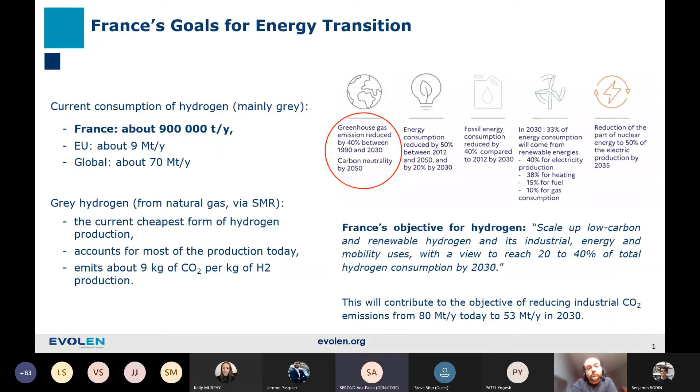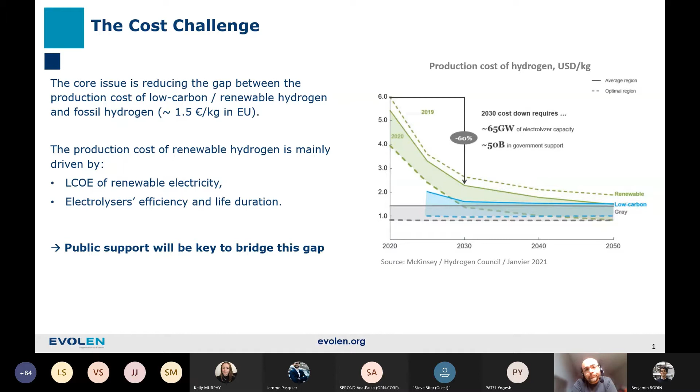So what are the stakes of this French hydrogen strategy? First, we have environmental stakes: decarbonation of industry and transport and overall reduction of greenhouse gas emissions. Second, we have economical stakes: the emergence of a new job-creating sector, and I'll present the objective afterwards. Third is energy sovereignty: we want smaller dependency on hydrocarbon imports. And fourth and last is technological independence, to enhance French assets in global competitiveness. Next slide, please.

So this French national strategy is quite ambitious and is designed along 3 axes. The first one is the decarbonation of the industry via the emergence of a French electrolysis sector. So we want first to decarbonize all the existing industrial uses that I've presented previously, mainly refining and ammonia, and also an industrialization supported by the massification of uses, in particular in the mobility sector.

The second axis is to develop heavy transport mobility using decarbonized hydrogen. This will be done via large territorial projects driven mainly by the French regions, allowing to mutualize hydrogen demand. The third axis is the promotion of R&D, innovation, and development of French expertise, including hydrogen to mitigate intermittency of renewable sources, new industrial uses, decarbonation of maritime and aerial transport, new infrastructures, and development of university campuses.

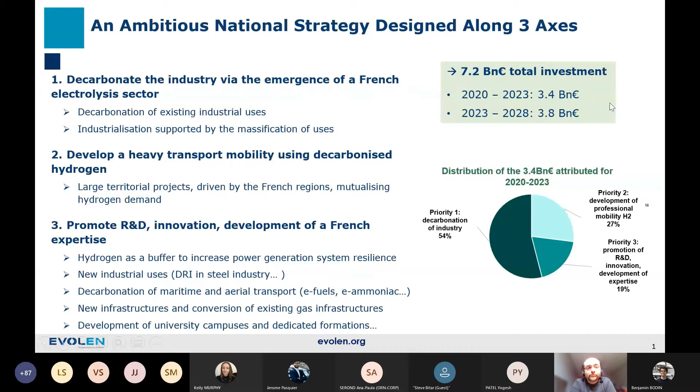The main objective of the French hydrogen strategy is to increase the installed base of electrolyzers from where it was in 2020, about 5 megawatts, up to 6.5 gigawatts by the end of this decade. That will represent an annual production of about 700,000 tons of green hydrogen per year, with corresponding avoided carbon emissions of 6 million tons per year, equivalent to the annual emissions of Paris.

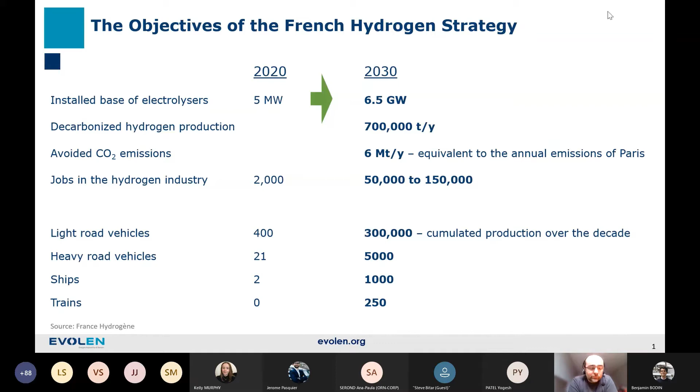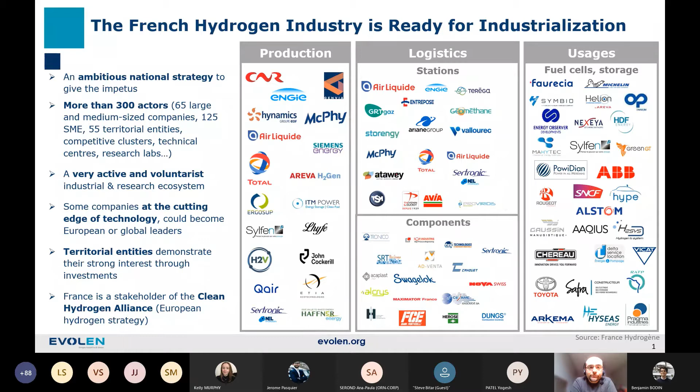Second, we've got in France the second largest offshore wind power potential in Europe after the UK, which could be key to developing hydrogen production from offshore wind - I will come back to this point afterwards. Third, we've got a low carbon electricity mix, one of the lowest in Europe and in the world, thanks mainly to nuclear energy. Fourth, we've got strong potential for storage in saline aquifers, with more than 100,000 tons of hydrogen capacity.

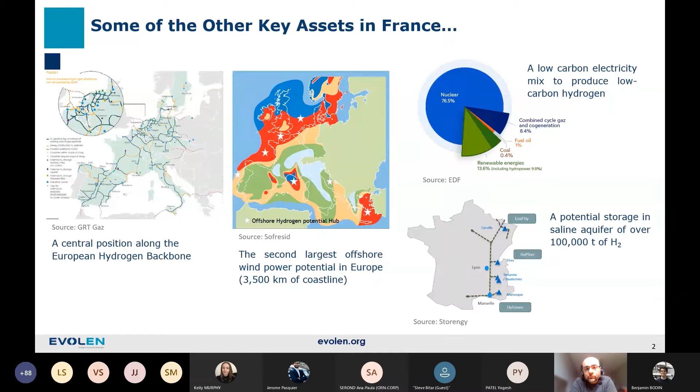Okay, so just a quick focus on one of the working groups we have within EVOLEN. This is a group dedicated to hydrogen production from offshore wind. The objective of this working group is to define business models applicable to the French market. We are trying to answer some key questions, such as: what is the value of producing hydrogen offshore rather than onshore? What is the optimal location for electrolyzers - in a dedicated platform or on the turbine? What are the technological requirements, in particular the marinization of electrolyzers, etc.

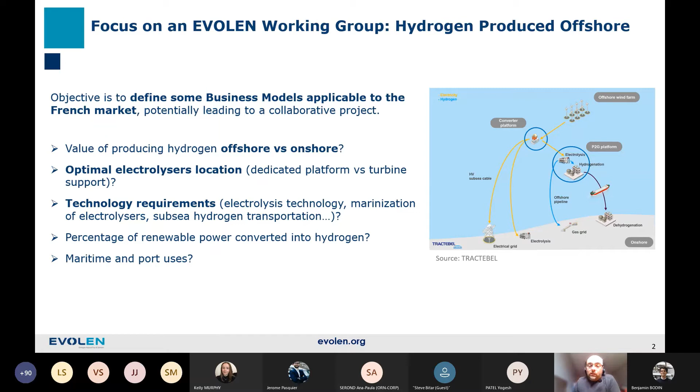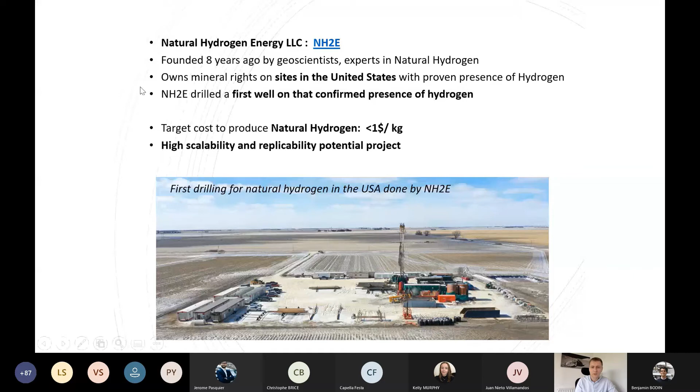I also sent a link for the video. I don't know if the video will be included in the presentation or not. And next slide, please. Yeah, sorry, go a little back.

And what is important to point out is that for the first time with natural hydrogen, hydrogen is not just an energy vector where you need another source of energy—electricity, methane, biomass, or something else—which you then convert to hydrogen and use. In the case of natural hydrogen, it is a primary source of energy.

So this is a primary new source of renewable energy. And of course, you can read more in detail in this paper.

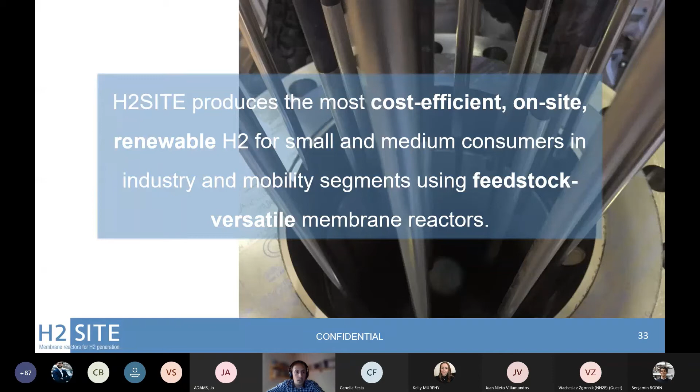The company was actually created as a spin-off from Tecnalia and the Technical University of Eindhoven. Both entities had collaborated on European projects for the last 10 years, gathering more than 70 million euros in European project funds to develop this concept of advanced membrane reactors. So once they got to a TRL level of around 8, partners looked for an external investor, and ENGIE showed its trust in the technology.

Since the investment of ENGIE, the company has raised 3 million euros in equity and non-dilutive funding, and these have been used to build the first 2 commercial reactors and to build a membrane manufacturing line that is being installed in Spain, and that will be operational in January 2021. Next slide, please. Well, why have we done that? In a nutshell, it's because, next slide, please.

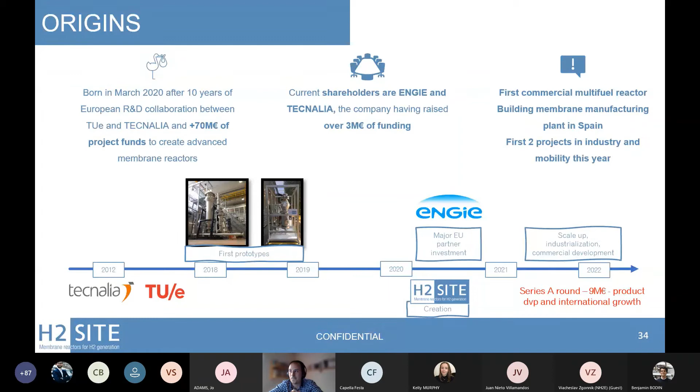Thank you. Because we know that transporting hydrogen is a pain in the neck. There are plenty of people that say that hydrogen will cost 1.5 euros per kilogram or 2.5 euros per kilogram, but the average small and medium consumers are paying 11, 12, 15 euros per kilogram. So transport represents today between 60 and 80% of the end price that consumers pay for this gas.

And this is not only an inefficiency in the form of price, but also an environmental issue, because over 10% of the hydrogen leaks during the compression, storage, and decompression phase. And hydrogen is actually an indirect greenhouse gas that has 5.6 times the global warming potential that CO2 has. So the question for us as a society, I guess, is, do we want to replace the CO2 problem with a hydrogen problem? Well, within H2Site, we do want to solve this problem for a market that is today poorly served, which is small and medium consumers of hydrogen.

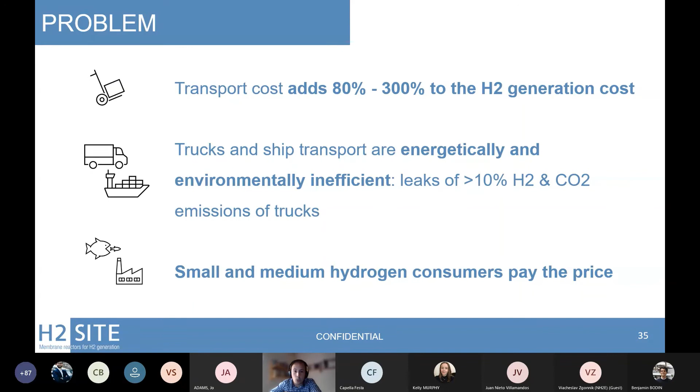Next slide, please. How does it work? Well, we actually do not like putting all our eggs in the same basket. This is why our systems are designed to work with very different feedstocks. We work with methanol, with biogas, with ammonia, with ethanol, with DME; we take whatever feedstock is available that contains hydrogen. We put it into a column that contains these small rods that you can see on the picture.

And these rods are our membranes. These membranes have a very, very high selectivity towards hydrogen, which is the only thing that can go through them. And this allows us to obtain fuel cell purity hydrogen in one single process step. All this goes into a 20-feet container that we deliver to our customers and install in 3 days. Next slide, please.

This is actually what our customers are asking from us. It's a modular, compact solution that they can install and remove in a few days, that can adapt easily to different environments. We are now targeting 4 market segments.

The first one is small and medium hydrogen consumers like flat glass, small chemistry, food and beverage. The second one is mobility for captive fleets like hydrogen refueling stations for buses and so on, but also onboard mobility to replace heavy fuel oil for the maritime sector.

Then there is separating hydrogen and adjusting the hydrogen content for hydrogen retailers and natural gas infrastructure owners. And finally, decarbonized backup power solutions for data centers and sensitive industrial processes.

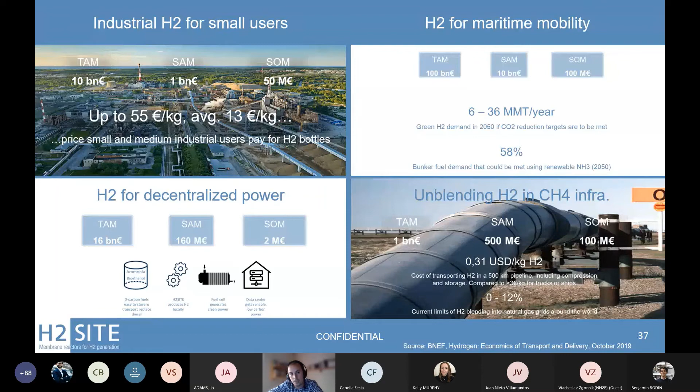So there are 2 product verticals within H2Site. The reactor you can see there is the generation vertical, right? So what we will do is we will feed, for example, ammonia through the lower part of it. We will heat it up to 300, 350 degrees, and hydrogen will go through the membranes that are inside the reactor, and we will recover it through the upper part of the reactor, sending nitrogen gas to the atmosphere.

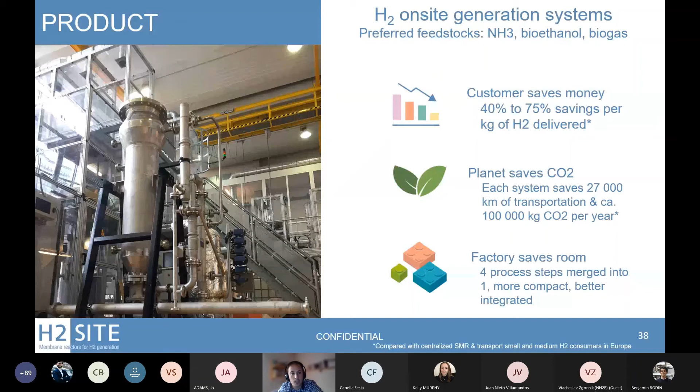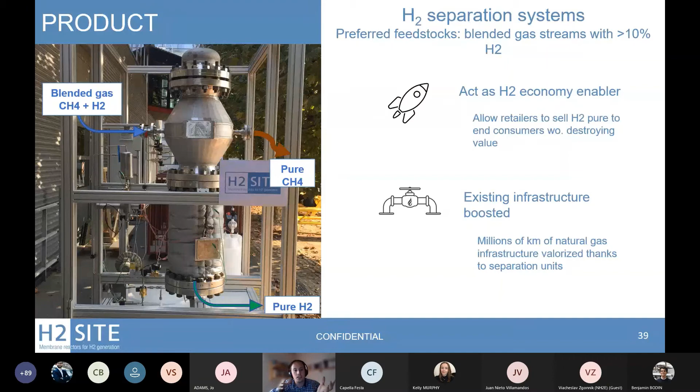This second column, thank you, that you can see there represents the product vertical separation. So as you can see, the column looks very similar, only there is no reaction in it. Membranes will simply act as a filter, and we will separate, for instance, the hydrogen from the CH4 in the blended gas stream.

So to summarize, our reactors today have been designed for small and medium hydrogen consumers from 4 to 4,000 kilograms per day, with numerous feedstocks and working at low temperatures, without the inefficiencies linked to downscaling a larger process that is meant to produce several tens or hundreds of tons per day.

And we hold intellectual property today that covers our unique membranes, the manufacturing and palladium recovery process that we use for our membranes in very little amounts, and the hydrogen separation capabilities from blended streams.

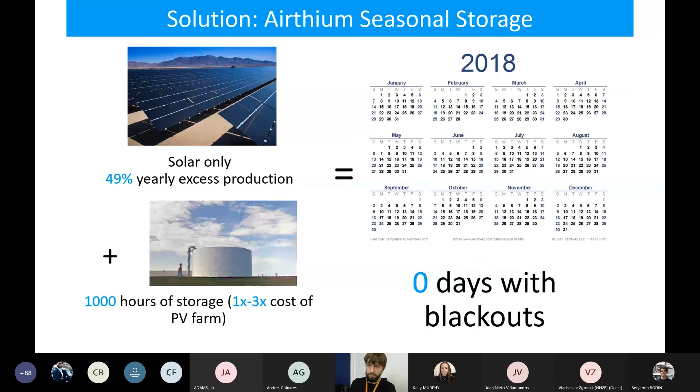So this storage can, of course, be used with any mix of solar and wind. Our value proposition is 100% renewable energy, guaranteed available 24/7, 365 days a year. Next slide, please.

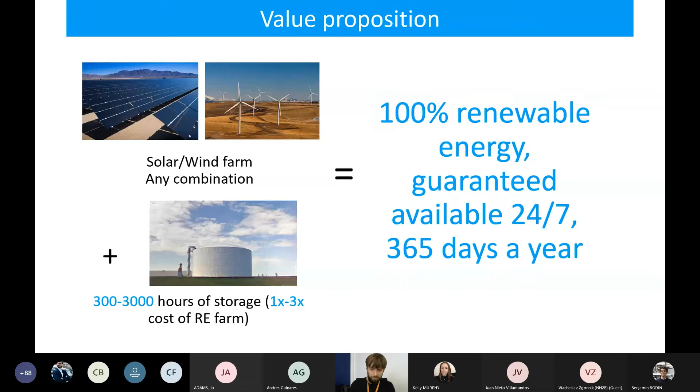So how does this work? With our system, the part that does the heavy lifting and enables the 1,000 hours of storage is an ammonia tank, liquid ammonia storage at atmospheric pressure, starting at 15 megawatt and 15 gigawatt hours, so 1,000 hours of storage.

Ammonia costs $0.2 per kilowatt hour capex to build. That's almost 1,000 times cheaper than the current price of lithium-ion batteries, and can be sited anywhere. You don't need a cavern to store ammonia. But ammonia alone cannot work quickly because the system used to produce ammonia, which is a green Haber-Bosch plant, is still expensive in terms of capex per kilowatt.

And furthermore, the current round-trip efficiency of power to ammonia to power, going through combustion for the last step, is currently around 30%. Obviously, if innovations like solid oxide electrolytic cells from Genvia and others come into the market, we will be able to get a higher efficiency because part of this 30% comes from the current electrolyzers, which have 65 to 70% efficiency.

And then to use ammonia a smaller fraction of the year, we use molten salt storage, which is kind of like in a computer. You have the SSD and the hard drive. The SSD goes very fast, but costs more per gigabyte, and the hard drive is slower, but it costs a lot less per gigabyte. So when you combine the two, you can downsize the scale of the Haber-Bosch plant and save on the cost of the entire system.

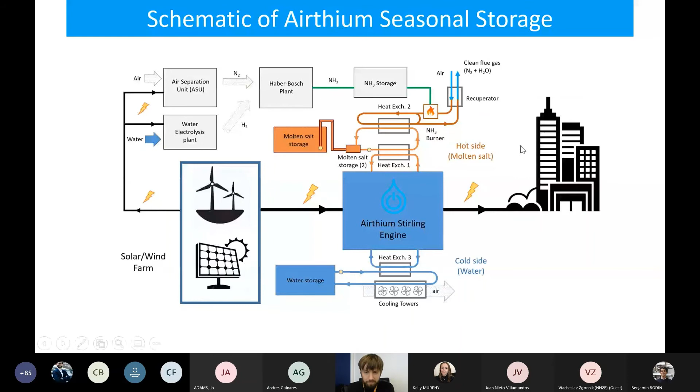Just to let you know, Andre, we have very little time left.

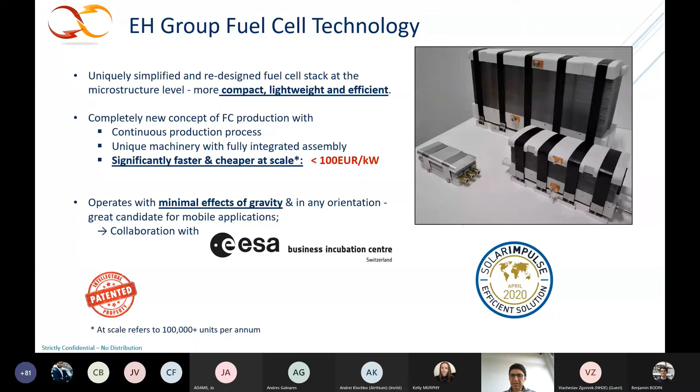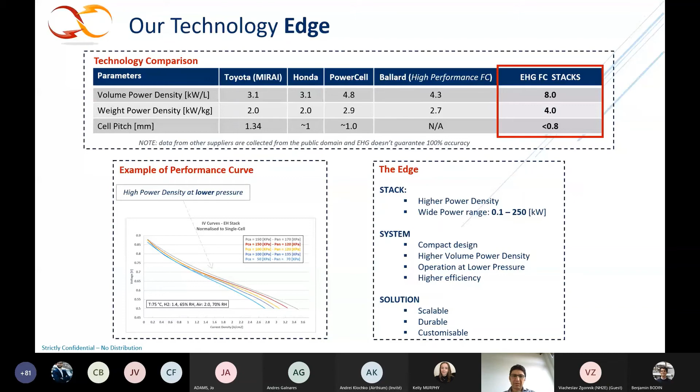Next slide, please. So this is a very general overview about our technology, where we are compared to existing technologies, in terms of volume power density and weight power density. Even with the first generation, we are well ahead of it. I'm not going to go into much technical detail, but another advantage our technology gives at the system level is that we're able to simplify the system and reduce the parasitic loads and improve the overall energy balance.

We are not limited to specific applications. We are looking at different ones: stationary, mobile applications, aviation, and maritime. But we see quite a lot of interest from heavy-duty trucks and buses at the moment recently, so we have a lot of activity in that sector, and specifically in maritime at the moment.

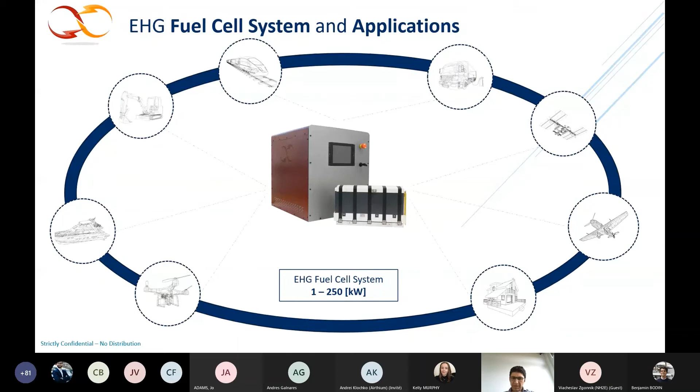Again, we're not limited to any application, I have to say. Each continent seems to focus on some specific part of it, but in Europe we see a complete mixture of all of them together, which is a very positive aspect of that.

That's it. With that, I've finished my presentation, and we welcome questions afterwards if you may have any. Thank you so much for your presentation.

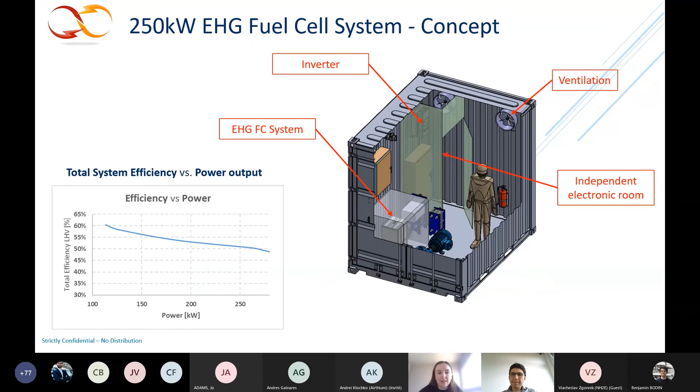Yes, good afternoon to all. I'm really happy to talk to you this afternoon. Within John Cockerill, I'm in charge of renewable activities in hydrogen.

Next slide, please. So a few words first on who John Cockerill is. We are a medium-sized equipment manufacturer with a turnover in the range of €1 billion, present all around the world, privately owned for the last 20 years, so a very stable shareholding structure, about 5,000 employees, and we are a leader in hydrogen.

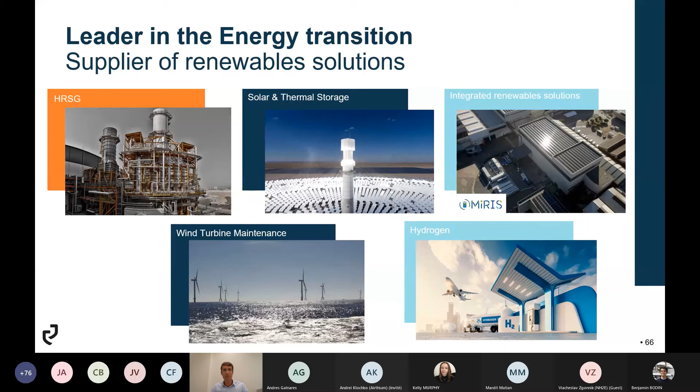Next slide. Indeed, in hydrogen—yes, next slide, we can skip this one in the interest of time. In hydrogen, we are the largest manufacturer of electrolyzers in the world today. We have several decades of experience, more than 1,000 references in many countries and industries, and a range of alkaline electrolyzers from very small ones all the way to the largest stack available today on the market, already with 12 references on these stacks.

We focus a lot on our commercial and technical development on much larger hydrogen production systems, above 100 megawatts up to 1 gigawatt. Today we have several of these projects under development, along with a large plan for R&D—I'll come back on that point later. And beyond electrolyzers, we also offer equipment for hydrogen mobility. Next slide.

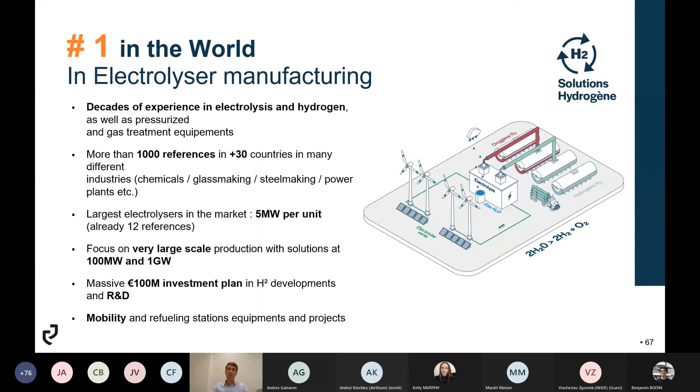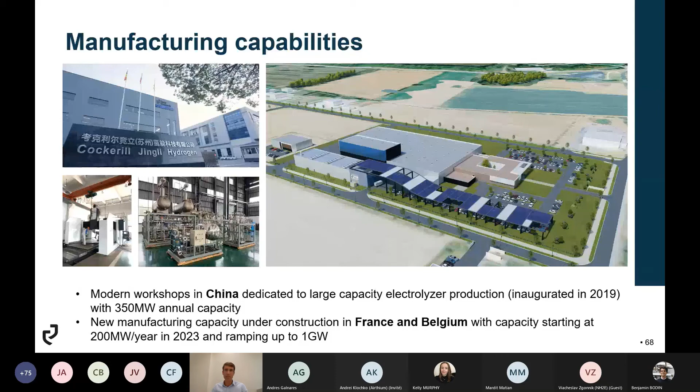Manufacturing capacity: today we have a brand new factory in China. It was inaugurated 2 years ago. It's the largest plant in the world, 350 megawatts running now. Beyond that, we have also announced a new factory, which is going to produce ultimately 1 gigawatt per year of electrolyzer in Alsace, in France. You see a picture of this factory. In fact, it's a conversion of an existing factory of John Cockerill, which is active in a different line of business.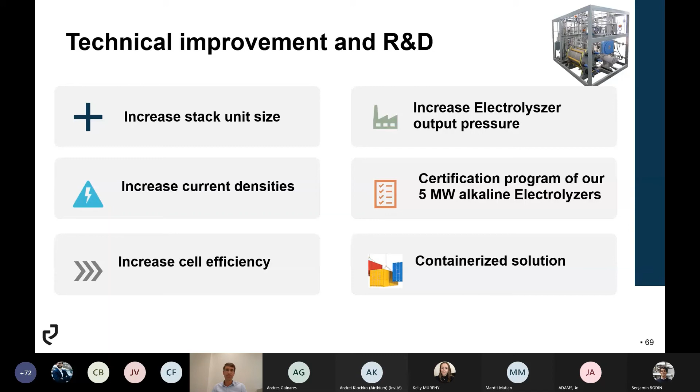Thank you, and nice to be here. Sorry, I have a hard stop at 4:15, so I will go pretty fast. I work for the venture capital arm of the Group Total. If you look at the first slides, just a basic overview of the Group Total, I won't spend a lot of time there. Just to say that we are one of the oil and gas majors that have moved quite the fastest to energy transition, and the role of our fund is really to catalyze this transition and invest in startups which are pushing the boundaries of carbon neutrality and energy transition.

So we focus on everything related to reducing emissions in the energy and mobility sectors. Even now we add circular economy as well. The way we work, we have a 400 million euro fund, and we invest more or less at every stage of maturity of startups in various sectors. We like to syndicate with financial venture capital funds, with other corporate venture capital entities, and the more the merrier. Basically, we try to bring value to startups which need to scale up, sometimes in an industrial domain. We are a small team, with about 60 investments so far. We also invest in funds. So that's the big picture, and our ticket sizes are typically between 0.5 and 5 million.

So that's in a very fast brush. That's what we do. You can see our portfolio, which shows the diversity of topics we are looking at. We've had some vintages, the years where we were strong on biofuels. Then we had a period in energy storage, more recently smart energy, and then mobility.